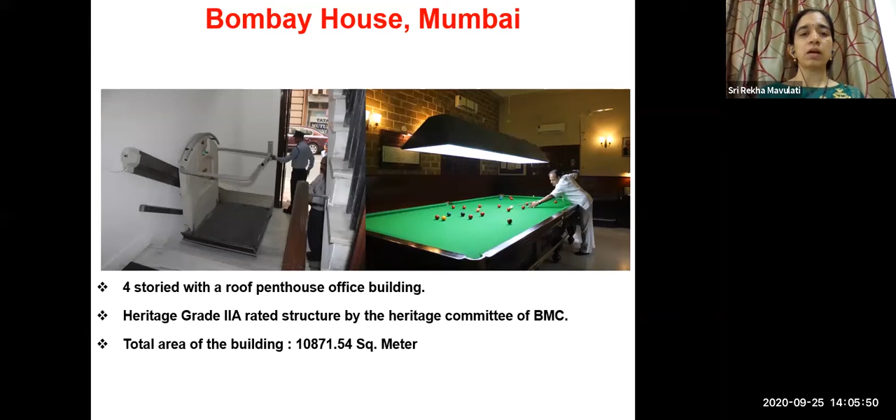Just to brief a little about the building features, it's a four-storied building with a roof penthouse office, and it's under heritage grade 2A. It comes under that category, and the area is about 10,000 square meters.

Coming to the energy performance index - how did this building, without any disturbance to their building envelope, achieve this energy performance? When they started in 2010, the energy performance index of the building was 192 kilowatt hour.

Since the management had in mind that they should convert to green, they implemented phase-wise different green measures, and they brought it down from 192 to 90 kilowatt hour.

Initially, in 2011, they installed efficient HVAC systems with high COP of 6.3, compared to around 4 in the existing condition. They went for high COP chillers, and their EPI came down.

Later, in 2012, they completely retrofitted their lighting into LED lighting, and then applied all star rated appliances. Star rated refers to Bureau of Energy Efficiency BEE star rated appliances, given by the Ministry of Power, which again brought the EPI down.

And finally, you can see they installed the BMS system, an automatic management system which can have overall control on whatever equipment they have installed.

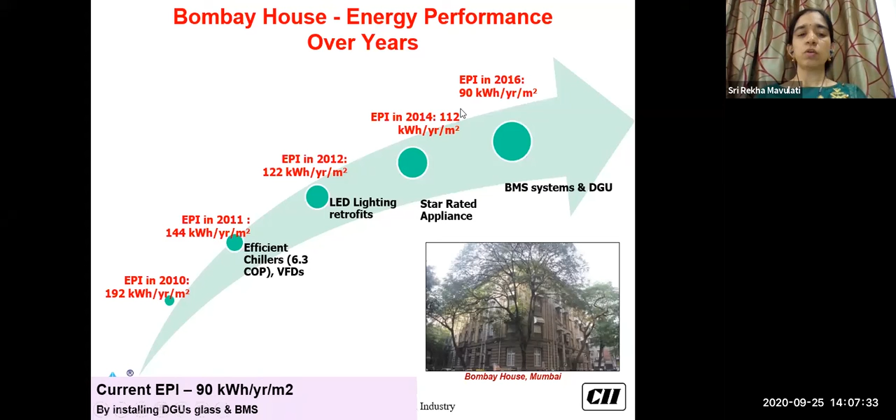They can monitor it better and maintain it better. Finally, they have come down to 90 kilowatt. So from 192 to 90 kilowatt, only in terms of energy performance, you can see how much drastic change they have got into. So this is just a graphical representation of how this building has implemented the green measures.

You can see that starting from, they have implemented changes to their water fixtures, so they've gone into water savings. They have implemented VFDs and BMS systems which can reduce their energy consumption. High efficient chillers have come in, and also star rated appliances have been used for pumps and computers, upgraded to energy star rated equipment. They've gone for efficient heating and cooling systems, lightings have been replaced with LEDs, and even rainwater harvesting has been implemented.

It's not just up to energy conservation measures, even in terms of water. They have considered rainwater harvesting measures by implementing collection pits as well as percolation pits, collecting the rainwater. They've also used alternative sources of energy in the form of solar PV systems and solar geysers installed in this building, and they have reaped the benefits out of it.

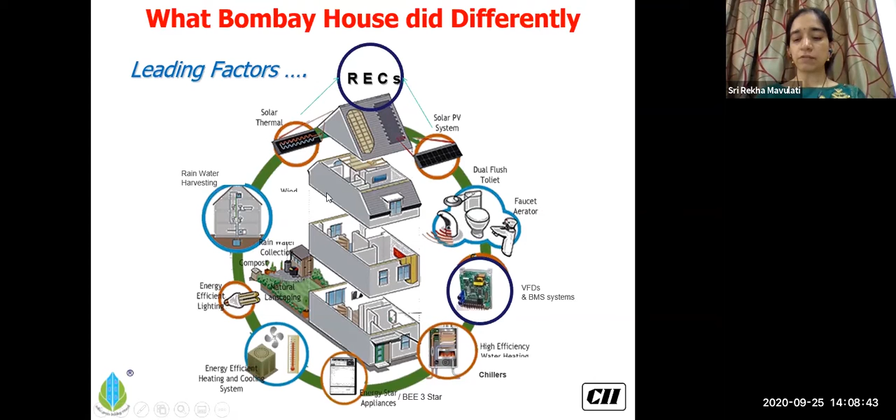If you see in terms of energy savings as numbers, you can see how much energy savings they have got, and also the reduction in carbon emissions. So finally, whatever concepts you've been exposed to from yesterday to today, we have to see whether it's implemented or not, and whether the projects were able to reap the benefits.

So here is the case study clearly showing that by implementing efficient measures in the existing building, for all the factors, they were able to get energy savings in every factor. Annually, they were able to reduce energy consumption by 5,17,000 kilowatt hours. So this makes a huge difference.

And definitely when there is energy consumption reduction, whatever carbon emissions are getting into the environment because of this energy usage or production of that power has come down. So 297 tons of CO2 emissions has come down annually. Every year they're going to reap these benefits. So that's how buildings are able to see results.

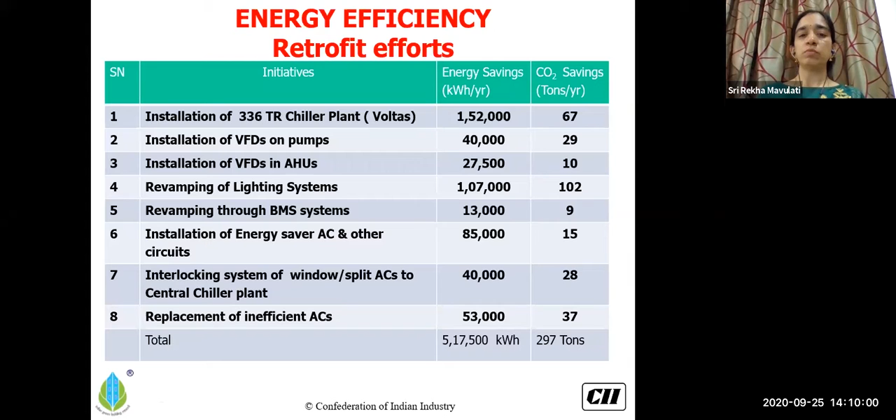And another project in terms of existing building, Godrej Bhavan, this is also in Mumbai, where they tried to carry out major retrofits by having water cooled chillers with high COP value. They had building management systems installed so that they can manage all the equipment in the building, so that they're integrated well and managed well.

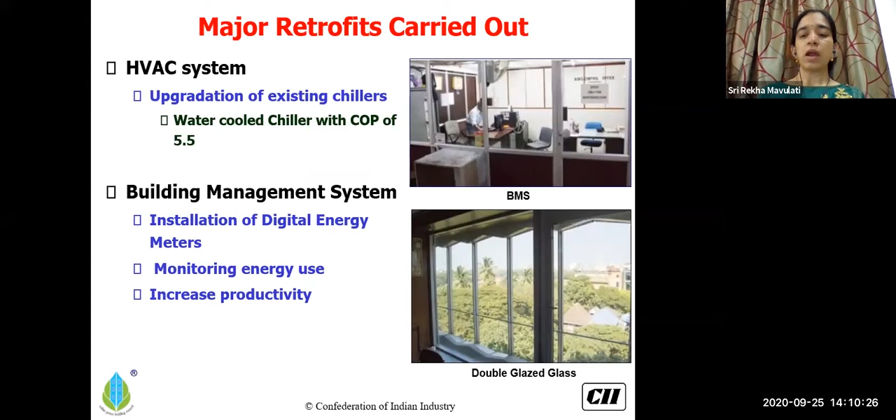And they've gone for efficient double glazed glass also, which reduced heat coming inside. Retrofits were also done in terms of the roof, where they converted their roof completely into green. They have upgraded their electrical systems to efficient systems, and also the lighting systems have been upgraded.

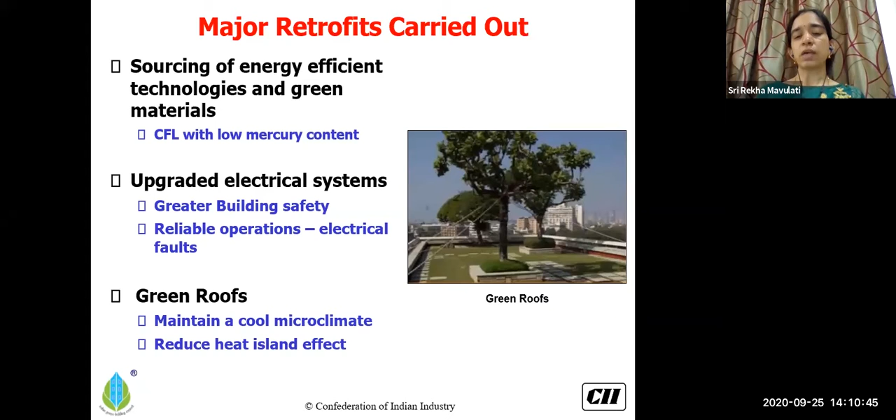So you can see this simulated file, which you might have observed in yesterday's presentation by Mr. Anand also, showing how the heat islands have been reduced on the green roof when compared to the paved areas. This simulated file clearly shows how the heat ingression from the roof has been reduced by installing the green roof.

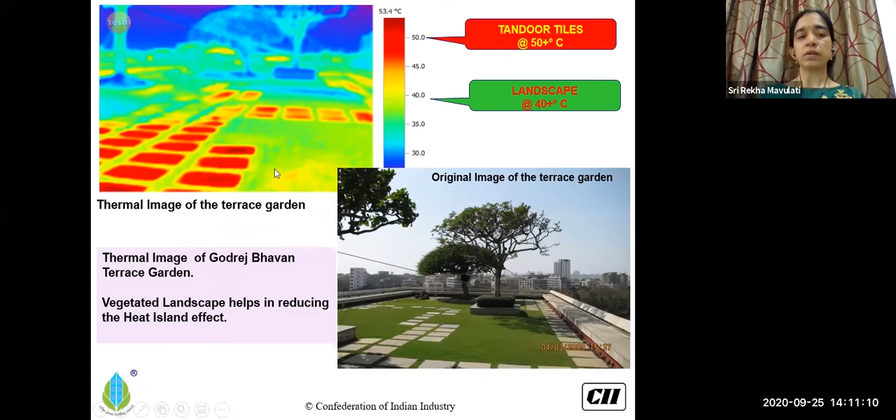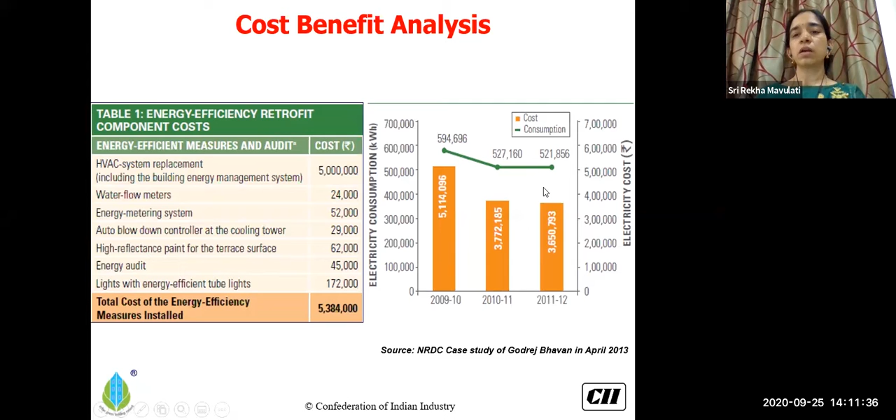In terms of the factory building, if you take it - okay, we have seen the commercial buildings in terms of existing ones. Of course, I didn't take new buildings because as you have gone through the concepts of green building features, it will be easier for new buildings to implement these green features and reap the benefits. That's the reason we have showcased existing buildings.

Now coming to the factory building, about the industrial building. Because even in factories, whoever the occupants are, the labor or the employees who are part of the factory building, they're getting exposed to a lot of emissions from the factory and they get a lot of stress as well. So in the factory also, we are trying to address the green building guidelines so that the occupational health of the occupants is increased.

Daylighting is taken care of, because artificial lighting will have an impact, and they should also reduce their energy consumption from lighting, and improve the indoors through better ventilation standards, while also increasing resource efficiency.

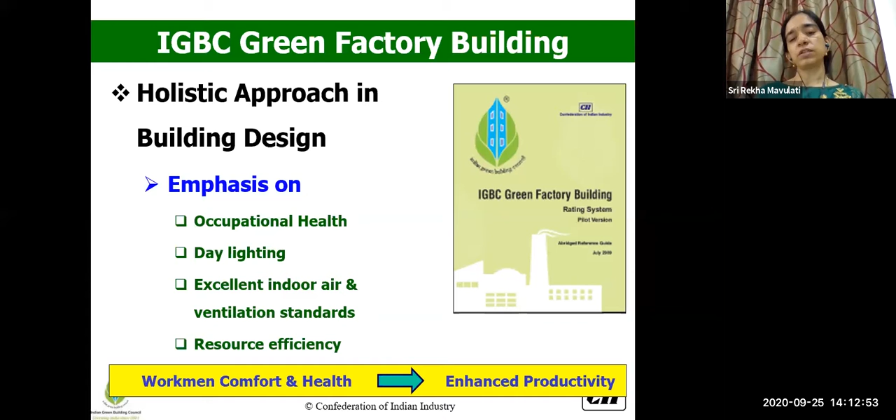When we provide all comfort conditions, definitely as indicated earlier, it's going to enhance productivity.

One of the factory buildings, Hero Motocorp, which has been platinum rated by IGBC, I'm going to show, where you can see they have taken the daylight pattern. All the skylights on the terrace and windows are oriented along the sun path analysis.

They have done the proper analysis, the latitude and the sun path analysis of this location, and they tried to capture maximum daylight.

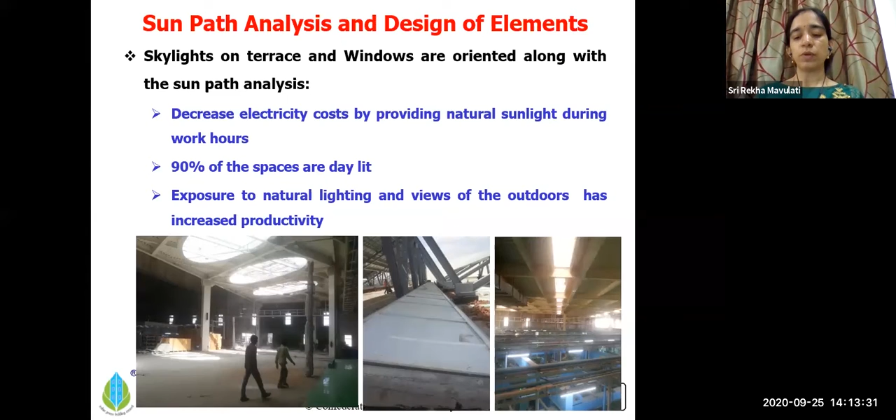90% of these spaces have been provided with daylighting and natural ventilation instead of artificial lighting.

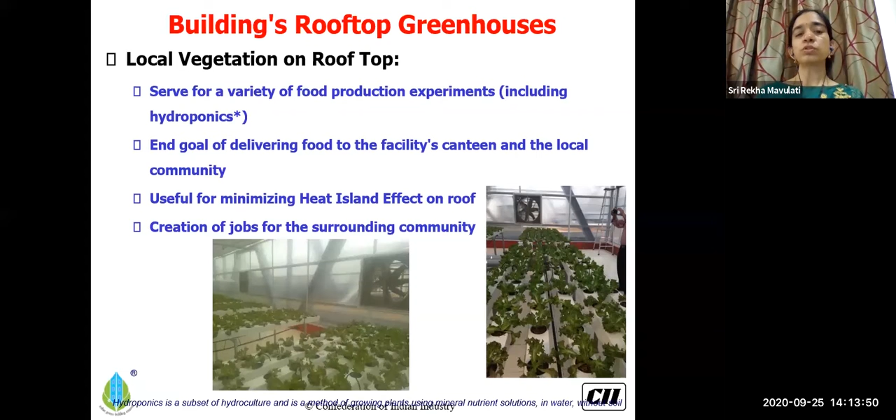On the rooftop, they have developed local vegetation where they had organic gardening, and whatever food is generated from this organic gardening, they are using within their canteen facility. This also helped them to reduce the heat island effect on the roof.

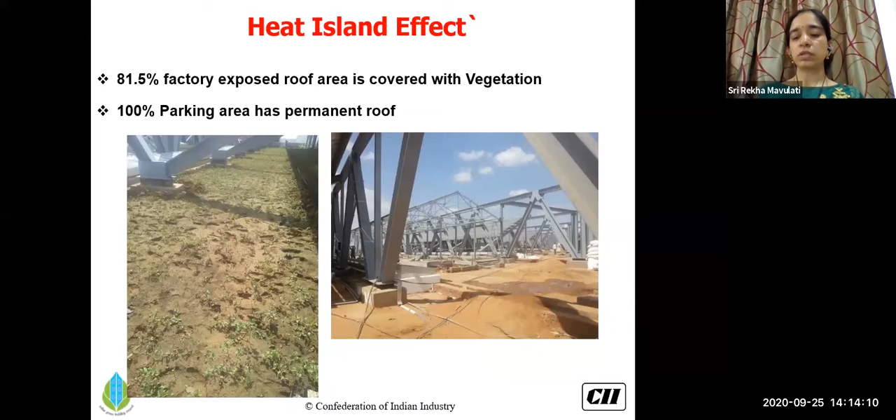You can see here again the heat island effect, even on the roof and the non-roof area, is also covered. 100% of the parking provided in this campus has been covered with a roof so that there is no heat island effect created.

And inside the building, they have developed bio walls, the green walls, because as we know, beyond the ground surfaces, vegetation is beneficial.

It gives us benefits in terms of aesthetics, improving the microclimate temperature, attracting habitat, as well as in a concept for greenery.

So when you take the greenery inside, there are additional benefits, because whatever emissions are coming inside the building, and also because of interior elements and chemicals used during manufacturing.

Even wooden products, paints or adhesives that have been used, these formaldehydes can be absorbed by the soil present in this vertical garden as well as the plants.

Also these green walls act as noise barriers. They will reduce the noise pollution created inside or coming from outside the building. So they have used these bio walls.

Another advantage is these bio walls will absorb the heat generation coming inside the building. Of course it's minimal, but at the same time it will reduce the heat loads as well as the consumption by the air conditioners.

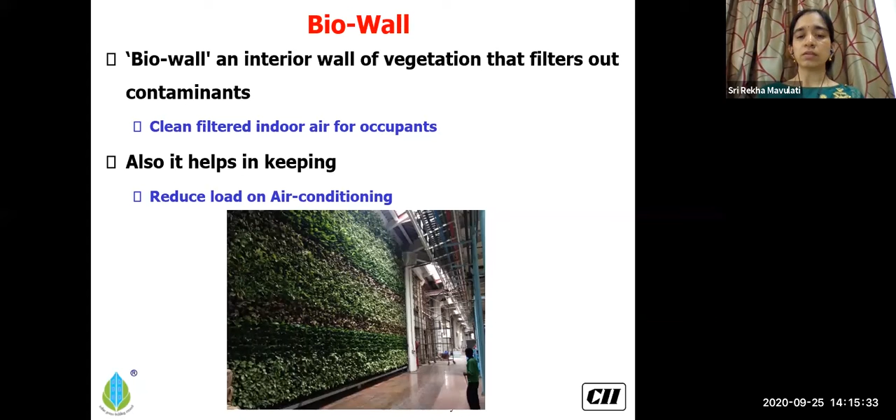They have installed solar panels over their roof, generating about 1.5 megawatts of electricity. They have been oriented facing south so that they can capture maximum solar radiation and convert it into power.

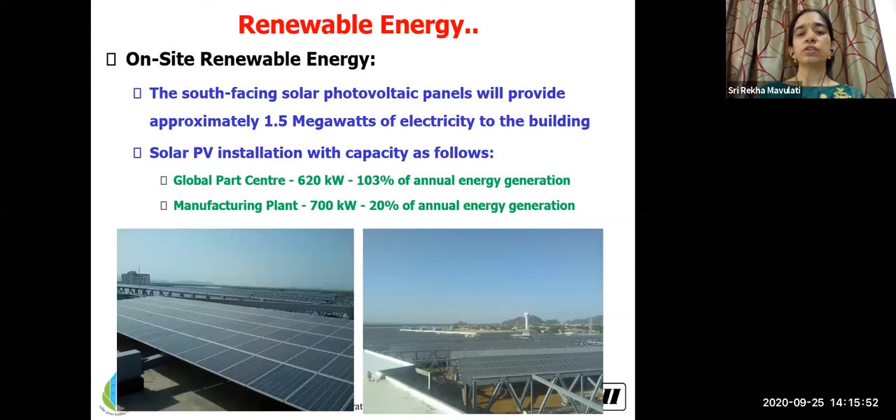Coming to the residential sector, because we have a varied sector, and it's always - we all stay in homes, and we try to see how we can convert our homes also into going green. So now we'll go through one case study in terms of homes.

This is one community in Hyderabad called Nandi Urban Homes, a beautiful community located in the urban city, which has implemented many green features.

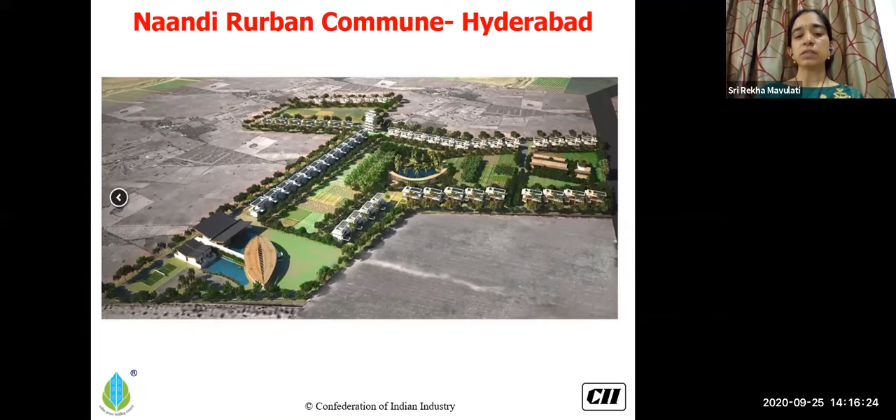They have a clubhouse which has used one of the largest bamboo structures in the country. The clubhouse has been completely constructed with bamboo structure.

Earlier, when they highlighted sustainable materials, we are encouraging more bamboo products because they are rapidly renewable. If you take 1.5 decades or 2 decades before, bamboo structures used to be limited.

Only small kind of hut structures or small farmhouses used to be constructed with bamboo.

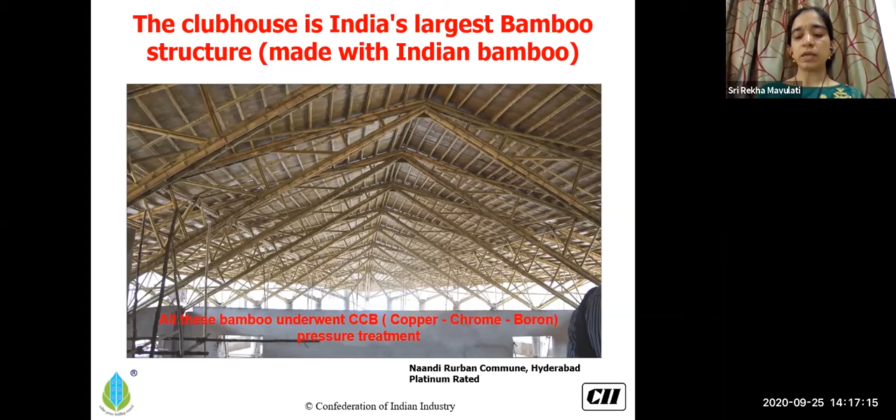But nowadays, with lots of new innovations and treatment happening for this bamboo wood, they were able to construct the largest clubhouse with bamboo structure, using this rapidly renewable material.

And to cover the heat islands at various paved surfaces and seating areas in their garden areas, they have created pergolas with vegetation.

So both the heat island is reduced, and you also have more vegetation which will maintain the microclimate temperature in this community.

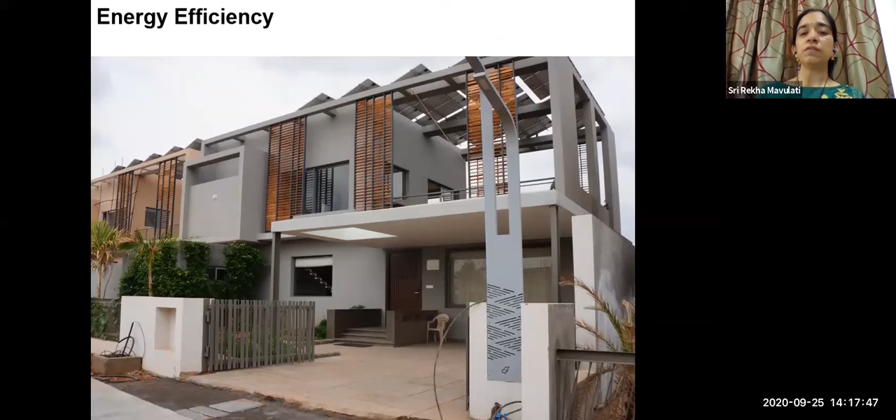These homes in this community have gone for energy efficiency even with their air conditioning. Their air conditioning systems have used earth tunnel air conditioning.

So yesterday you have seen there are passive ways of systems to reduce energy consumption. This project has implemented earth tunnel air conditioning systems.

You can see the pipes running underneath each house. By design itself, they have constructed it like that.

From the earth tunnel, the cooled air is taken to the homes, pre-cooling them. As the building is pre-cooled, the air conditioning loads get reduced in this building.

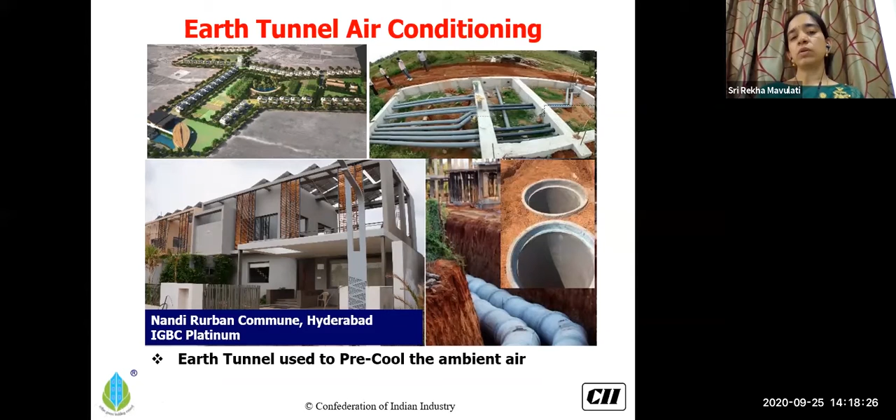They have also installed solar panels, about 989 kilowatt capacity, generating about 1200 megawatt hours of solar power, which they use for all the community facilities within the campus.

Not only vegetables, this community has developed animal husbandry within the community, so milk products are also obtained within the community in a sustainable and organic way. They don't have to worry about chemicals being mixed into the milk or milk products they're getting. That has also been tried in this building.

They have a biopond, which is one kind of phytoremediation. In this pond they've added facilities for pisciculture, aqua plant growth, and water supply for irrigation through this bio pond. Whatever wastewater comes from their one common dining facility within the campus is treated here.

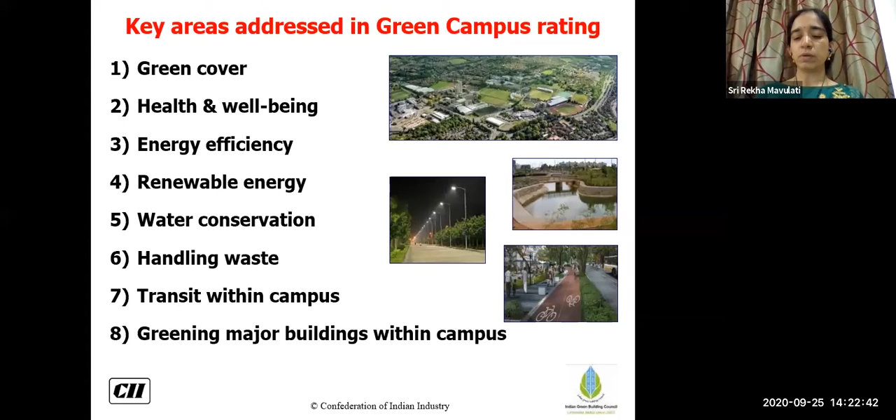The key areas we address under the campus rating system include green cover, which is encouraged throughout all our rating systems. We look at health and well-being facilities the campus can provide to improve health and fitness of occupants, energy efficiency, renewable energy, water conservation, waste handling, and transit systems, since large campuses need transit systems. Eco-friendly transit communities are addressed as part of campus rating, as well as how the buildings within the campus can incorporate green building features.

As part of the case study, this is ISB from Hyderabad. I've taken one of the big projects under the campus rating system, where they have the academic center in the center, and around this academic center they have student villages, which also represent some iconic towers in this campus.

In terms of green facilities in the campus, they've provided passive architecture. In all the buildings they've tried to have skylights to capture maximum daylight and reduce dependence on artificial lighting. They've used the natural topography—whatever existing topography was there, they tried to retain it, so there's ecological balance and they're not completely disturbing the habitat of the site. They've maintained the natural topography of the site.

Accordingly, they've designed their zones. They have wastewater treatment and are completely reusing the wastewater for their irrigation requirements as well. They've used efficient plumbing fixtures to reduce their water consumption.

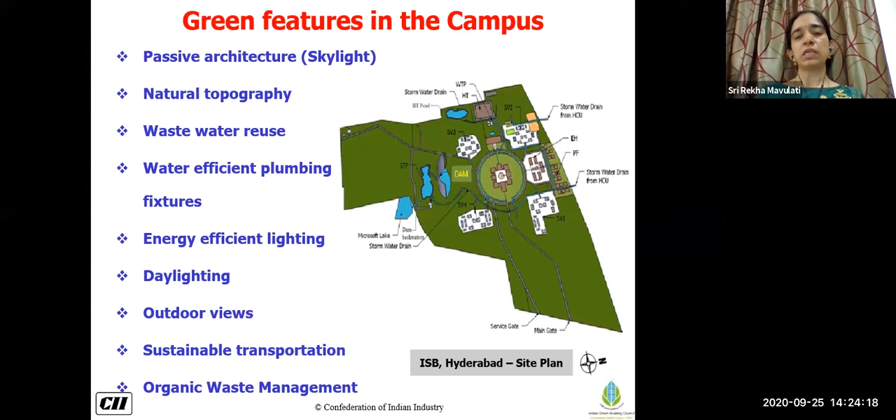They had skylights and a lot of windows provided so that good daylighting is taken. Outdoor views are provided for the people so that they can de-stress themselves. And sustainable transportation facilities are provided within the campus, as well as organic waste management.

So in terms of addressing the passive architecture, you can see how they have oriented their buildings. First, they had maximum openings on north. As we all know, north light is a good daylight, which has a good VLT, the vision to the human eyes, as well as less heat coming from the north direction. So they have taken maximum openings on the north side.

And on the south and west side, opposite side where we have a lot of heat coming, they have created less openings and buffer spaces so that the direct heat is not coming inside the building.

So when I say the passive elements, they have added elements like lakes, the water bodies. So when the air is passing through these water bodies or the trees which are there around these buildings on the south and west direction, it gets cooled because of this passiveness of the water and vegetation, and the cooled air is coming in. It's not very cold air, but compared to the temperature, there will be at least 3 to 4 degrees of temperature reduction.

And also on the east side, they have exposed maximum windows and openings so that they can again get good daylight.

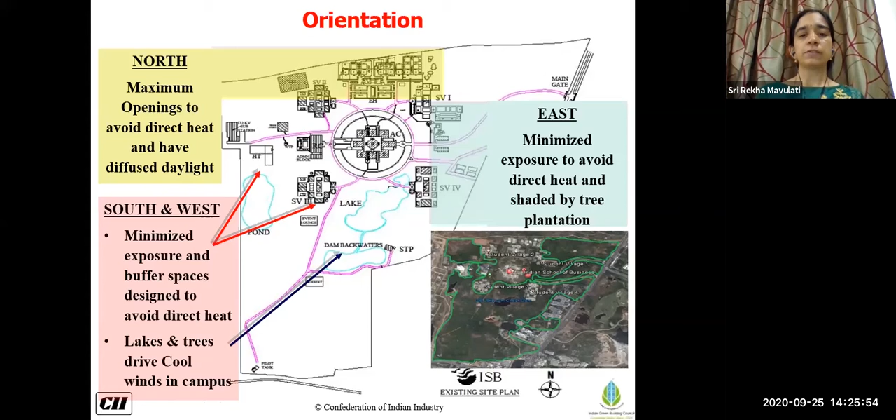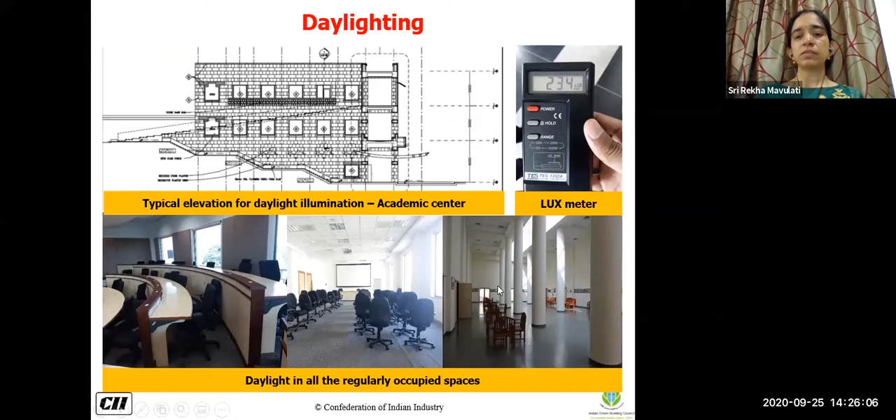So this is an elevation where you can see they're capturing the maximum daylight in the academic center and various regularly occupied spaces. The daylight has been taken.

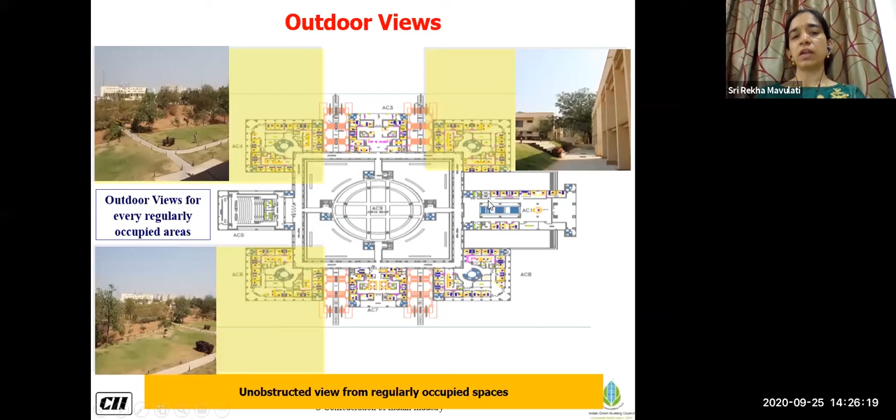They have provided outdoor views. So when we say outdoor views, it's not just up to the building. They have good unobstructed views to the vegetated area, so that the occupants can de-stress themselves.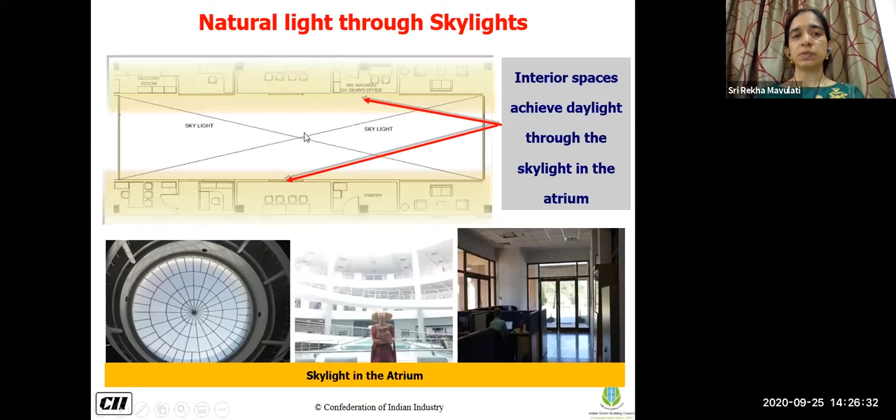So the total building footprint of this campus was about 8.64 acres, where the hardscape area is about 17 acres, and the landscape area is also there. You can see how out of this landscape area also, they try to minimize the turf area, because as we all know, turf area will take a lot of maintenance and water as well.

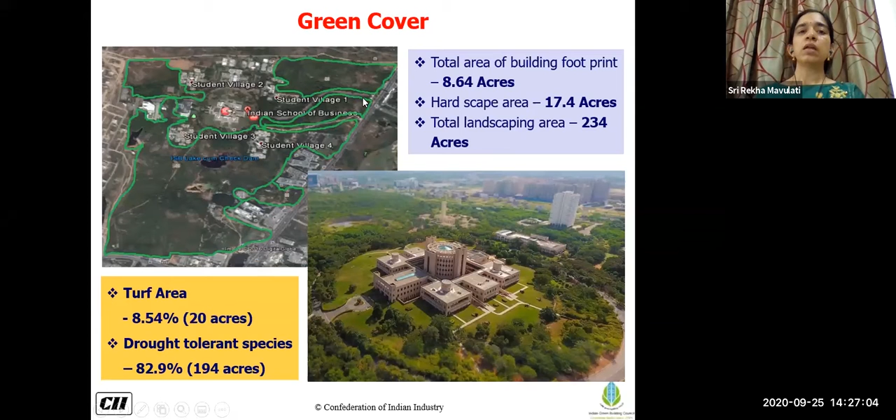So the turf area is also covered, and they have used a lot of drought tolerant species so that there is less water consumption. So they have used different kinds of vegetation, because they wanted to have varied types of species and try to reduce consumption.

So in all this vegetation, they have tried to have different types of gardens also, because they can attract varied types of habitat rather than just one kind of birds or butterflies into their garden. So varied types, typical gardens, the rose garden or organic gardens, help them improve their biodiversity attraction also. They even have an in-house nursery to have more vegetation.

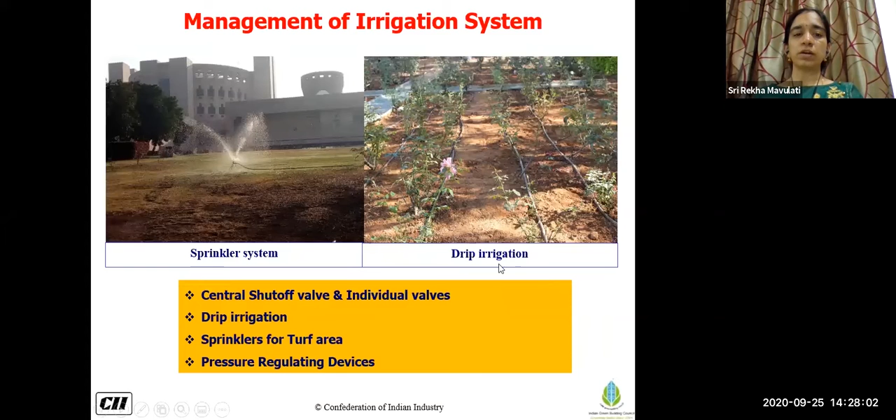So they had irrigation systems so that they can reduce water consumption, drip and sprinklers. And they have provided shaded pathways, so heat islands are reduced. And they have used open grid pavers, so again heat island is addressed in terms of the pedestrian network also.

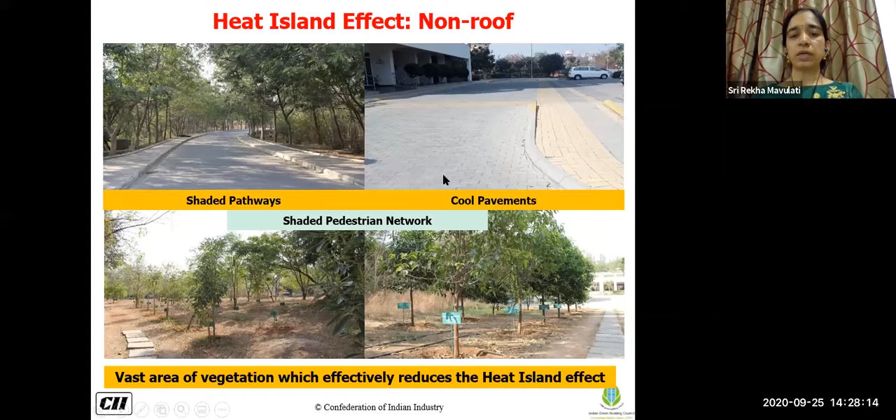So there is a lot of vegetated areas. And even the heat islands are addressed in terms of parking areas, where you can see they have been covered.

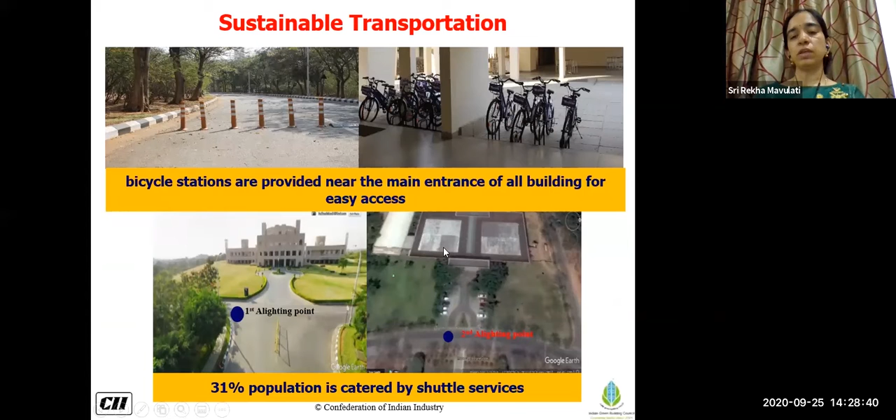So even eco-friendly practices - they have cycle arrangements, separate designated parking space for them. So bicycle stations are provided, and 31% of the occupants in this campus transit by shuttle services. So eco-friendly practices are considered.

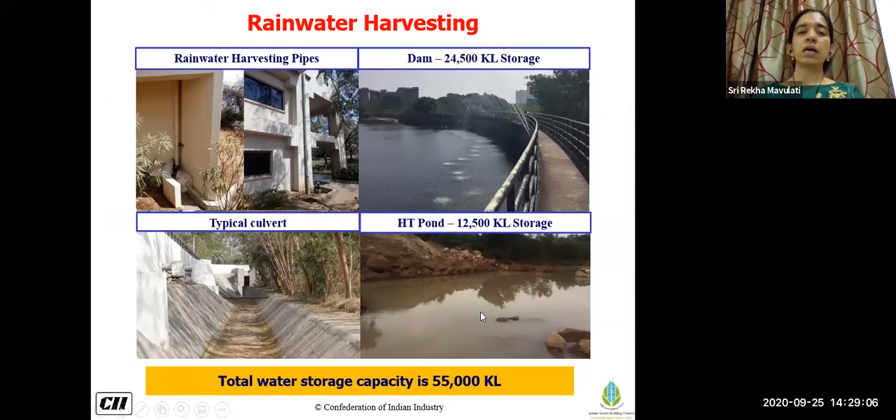And even the rainwater harvesting - they have a huge storage pond with a capacity of 12,500 kiloliters storage, and also drains and different ponds that they have created. So overall about 55,000 kiloliters of rainwater is collected in this campus, and they reuse it for their irrigation requirements within the campus.

So 100% of one day's rainfall can be captured, because when they developed these harvesting zones, they also created stormwater drains depending upon the plains. The slope has been considered and the rainwater is collected.

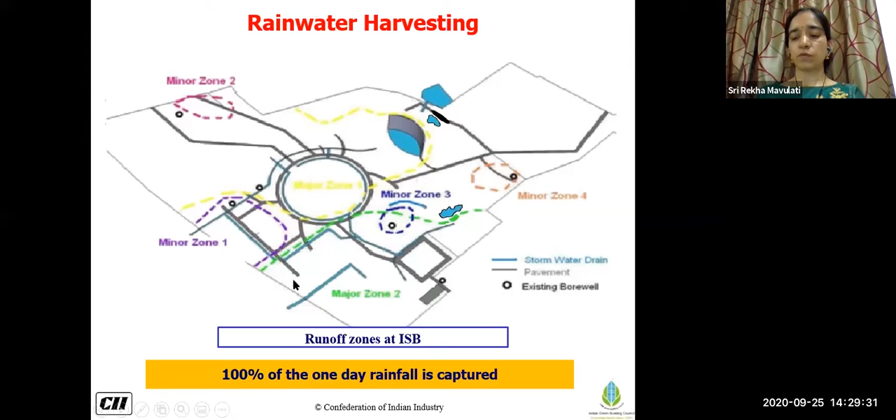The wastewater treatment plant has a capacity of about 500 KL, and they're treating and reusing it for their cooling towers also. So they have various meters for the bore, building level and power backup systems, all the meters, so that they can regularly monitor.

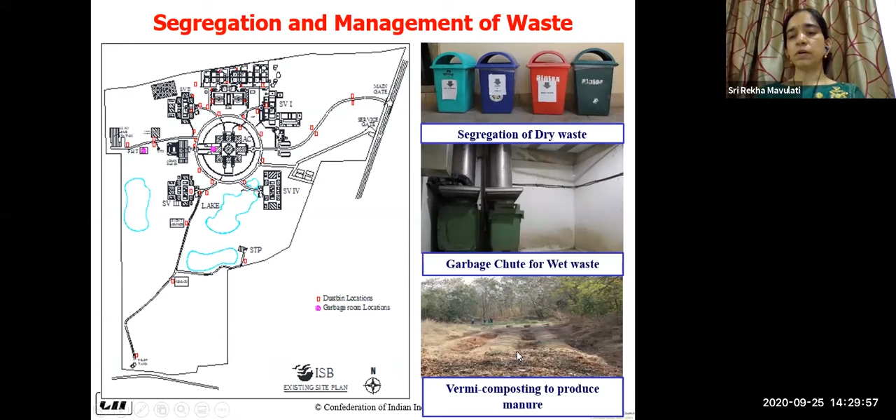So waste is segregated properly, and the organic waste - they do vermicomposting, and they have garbage chutes to collect the waste as well. So this has happened at the campus level. They have provided the basic amenities also within the campus, and the health and well-being facilities you can see.

And also further improving the healthcare facilities, they have first aid facilities and security services, non-slippery ramps for addressing the differently abled people, and designated toilets.

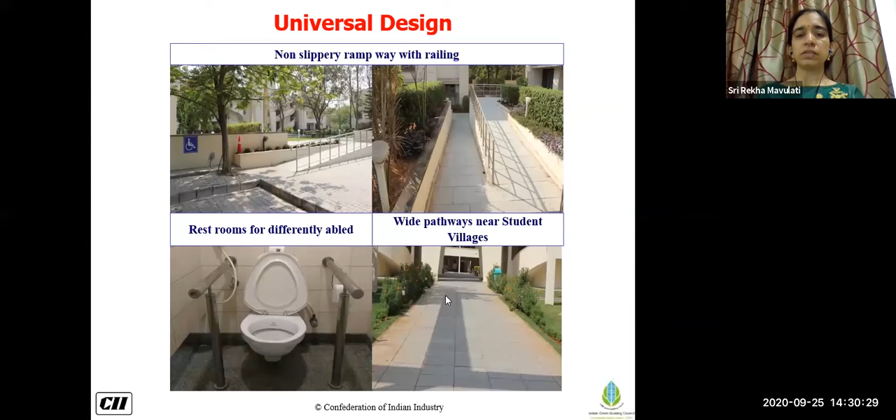And finally, even green education activities have been taken up by ISB. They regularly do awareness sessions within the campus, spreading more awareness on green buildings and sustainability features. They organize various talks by experts and conduct a lot of competitions within the campus, and have tried to implement a few measures through student research, seeing the various benefits from green buildings.

And yeah, that's about a few case studies. Now coming to the concept of green education.

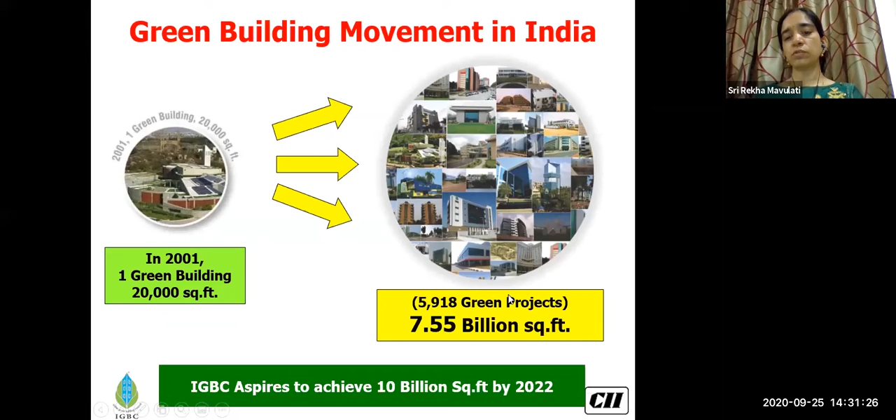This is a demand we have got into the market. As you all saw yesterday, the green building movement has grown from 2001 to about 6,000 plus projects. When we started, green building was seen just as an image. Later, people saw that green buildings also make business sense by giving savings in terms of energy and water. Further, it has become a customer driven demand, so there was clear differentiation, and people in the market were demanding green buildings.

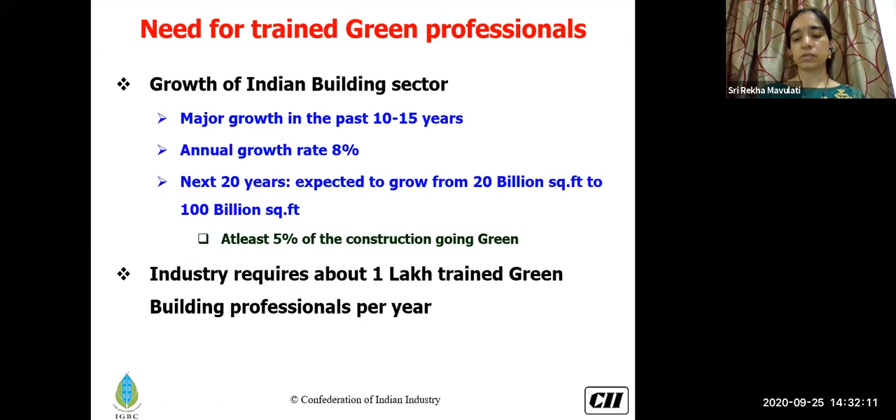As this movement increased, as the building sector increased, there was major growth and requirement for green building professionals also, because buildings are increasing, awareness is increasing, and people are looking for more green building professionals. With that vision, as we were working, IGBC developed new services because of this green building movement, and also developed new consultants in the market.

So the green building consultant has come to the market. Many engineers and architects have been trained as green building consultants, and they're able to facilitate green building projects. There are energy simulators available, which is a new area green buildings has got, and commissioning agents. IGBC has also trained many professionals who can become internal trainers on green buildings, and we have developed third party assessors who can assess the projects and certify them. So that came because of demand, the professionals have come.

But it's not just restricted to professionals. Even academicians and a lot of universities were also looking for training for the students. So with that vision, IGBC developed these green education services to train more and more students in the green built environment, and also to facilitate industry and academia linkage.

So in these green education activities, whoever the students are participating, these are the benefits they get. They get accreditation as IGBC accredited professional associate. They get exposure to various concepts in design, construction, and operation. Yesterday and today you had an overall briefing on the concepts addressed, but each topic itself has a lot of information to be shared, the knowledge, how to implement it, and the various strategies. So in the certification courses, students will get deeper knowledge on these concepts.

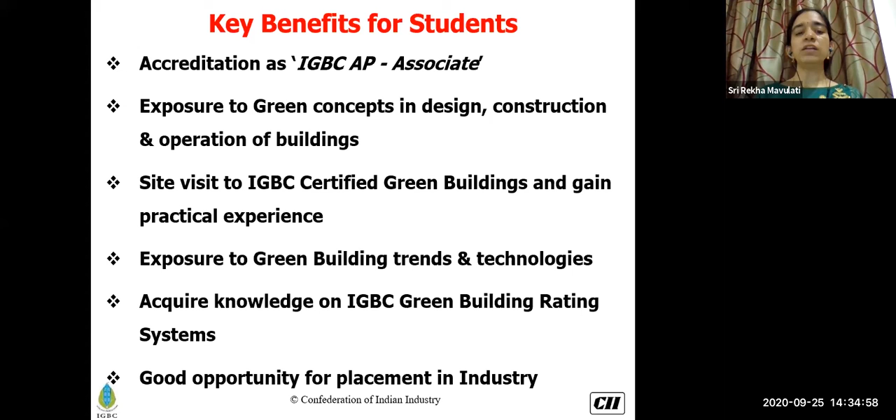And also, when they become professionals, they need to know, if their clients want certification, what rating systems are applicable for what kind of project. So they get exposure to IGBC rating systems. Finally, when they get accredited and gain more knowledge, since CII is the industry association and we have a lot of industry members as part of our organization, we spread awareness that these students have already been trained, and this IGBC AP associate becomes an additional USP to their qualification to get recruited in the industry.

So as part of the course, this is the duration. We have developed a curriculum course for the whole semester, running for 45 hours, of which we run the course for 15 hours, where IGBC trained faculty will train the students, and we will also train the faculty. Whoever the faculty from the college is, the college management can nominate the faculty, and we train the faculty as well.

Since they are more available in the college to the students, once we have trained this faculty, they can train the students. We also facilitate conducting various webinars from industry experts, and additionally we will be providing visits to projects, as I said, and they will become certified IGBC professionals.

So these are the focus areas. As you have gone through the focus areas from yesterday, all the focus areas in terms of site, water management, energy, materials, and indoor environmental quality are addressed as part of this certification course.

Besides the benefits to the students, even the institution and faculty get a lot of benefits. The institution gets more linkage with the industry, including campus recruitments and whatever research the industry requires. When an institution takes this as one of the core subjects, people consider it a preferred destination for recruitments, because students are also trained in sustainability aspects.